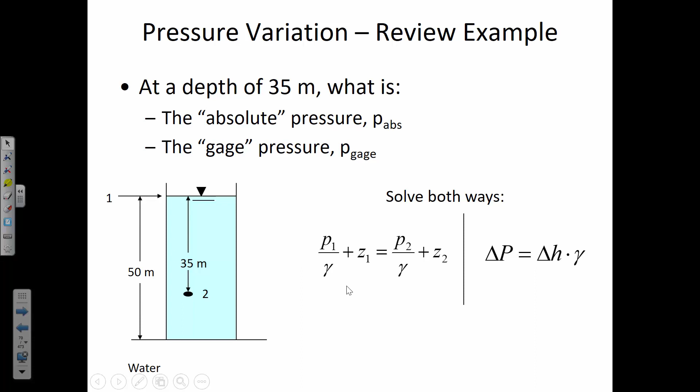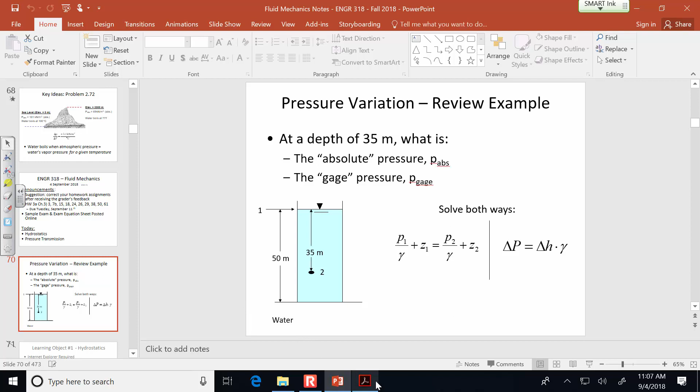Okay, the full version of the hydrostatic equation is P1 divided by gamma plus Z1 is equal to P2 divided by gamma plus Z2. What this is saying is that if you go up in elevation, you're going to have a decrease in pressure. But if you go down in elevation, you're going to have an increase in pressure. Between 2 points, those things are conserved. So between location 1 and location 2, the sum of these two terms will remain constant.

So we know both the elevation and pressure at 1. We know the elevation at 2. Our unknown is the pressure at 2. So I can rearrange that hydrostatic equation to solve for P2. It's going to be P2 is gamma times P1 divided by gamma plus Z1 minus Z2. Now, by the way, the problem statement never said what the unit weight of water is. That's a fluid property that I hope that you'll memorize.

Both the density of water and the unit weight of water, probably even without any effort of memorizing them, you're just going to eventually learn certain constants through the semester, and that's one of them you kind of just need to know. So if we substitute in the values, the pressure at 2 is going to be 9810 newtons per meter cubed times the pressure at 1.

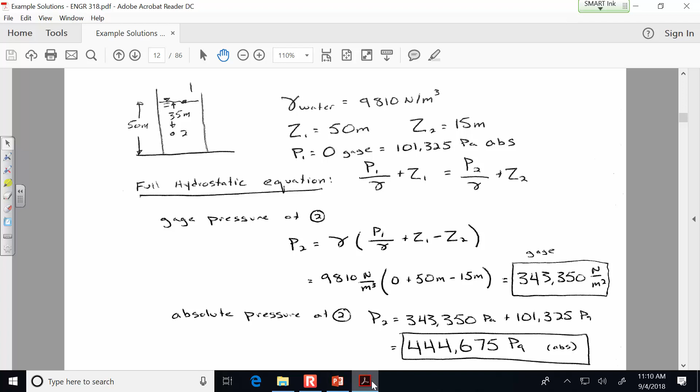If we do the abbreviated version of the hydrostatic equation, then what we're saying is delta P is delta H times gamma. Okay, so the change in pressure is going to be 35 meters multiplied by the unit weight of water, 9810 newtons per meter cubed. So the change in pressure is going to be 343,350 newtons per meter squared, which is the same thing as a pascal. So that's our gauge pressure, because at 1, the pressure was 0. So it starts at 0 and it increases by 343,350.

And so the pressure absolute will be this same pressure plus 101,325, which is atmospheric on the absolute scale. So it'll be 444,675 pascals. So our absolute pressure is the same regardless of whether we use the full version of the hydrostatic equation or the abbreviated version of the hydrostatic equation.

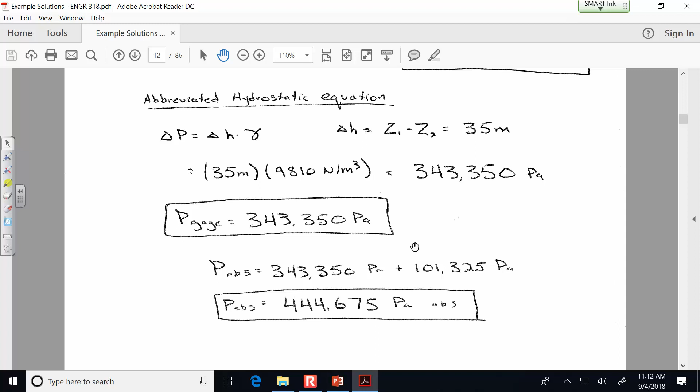Now, the hydrostatic equation describes conditions as long as the water isn't moving. So let's consider just a little illustration. I don't think this is in your notes. This is another bonus. Let's say that we had a reservoir and a water fountain was directly connected to that reservoir. It's not really like this. In reality, there'd be a treatment plant in between so that you don't have to drink dirty water. But let's just assume we punched into a dam and we've got a water fountain at the other end of that dam.

So in an example like this, we know the water surface elevation. Sometimes in problem statements that'll be abbreviated WSE, water surface elevation. So we know the water surface elevation and we know where the fountain is, the elevation of that fountain. So let's go through and calculate what's the pressure in the water fountain and then compare that to the manufacturer's maximum pressure the fountain can handle, which is 850. So if we were going to take that pressure all the way up to the limit, how high could the water elevation go in order to keep the pressure inside the fountain no greater than 850 kilopascals?

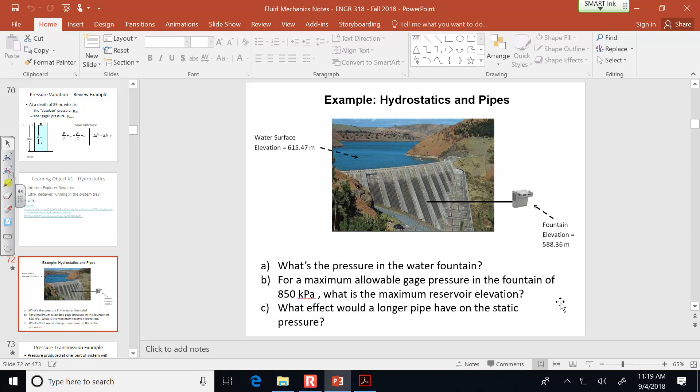All right, so when we find the pressure in the fountain, we assume that the air pressure, the pressure of the air that's just immediately in contact with the water, we're using that as our baseline. So we're saying air pressure is 0. We want to know the pressure in the fountain over and above the pressure of the surrounding air. So that means we can apply the hydrostatic equation, assuming that the air pressure is 0. So let's zoom in on this a little bit better there. All right, so we've got the elevation of the water, the elevation of the fountain. I calculated the delta H based on the two elevations that were given, the difference between the water surface elevation and the fountain.

So it looks like 27 meters of water is going to give us 265,949 pascals, so about 266 kilopascals. Ironically, that's just like the bare minimum pressure that most people would consider acceptable. So you need about a column of 27 meters of water to generate enough pressure that people are going to say, yeah, that's enough to flush the toilet and have a good shower. So that's kind of at the bottom end of the spectrum for typical municipal water pressures.

On the other end of the spectrum, 850 is usually used as a maximum design pressure for municipal networks, and often the limiting factor are water fountains and hot water heaters. They sometimes will have pressure seals that are a little bit sensitive to anything greater than 850. So they could start to leak beyond that.

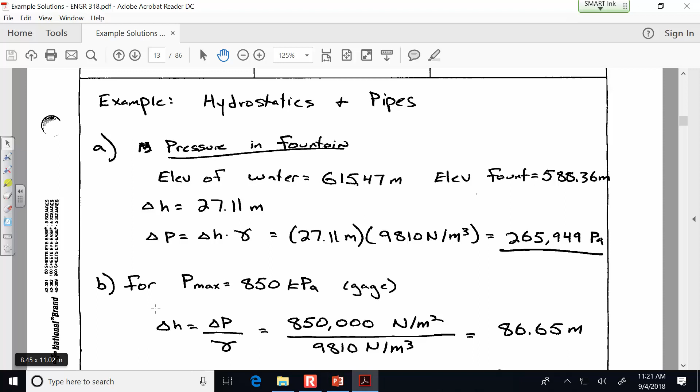So if we're saying the maximum pressure is 850, then what we're solving for is how high the water can be above the fountain. So we're solving for a delta H there. So we could have 86 meters of water above the fountain. And so if we know the fountain elevation is 588.36, then we go 86 meters above that. So that works out to a maximum elevation of 675 meters.

So anybody else get that same elevation? That would be our maximum. We wouldn't want the lake to go any higher than that because then our water fountain might leak. All right? So we'd have to tell whoever's operating that lake not to let the water elevation get too high.

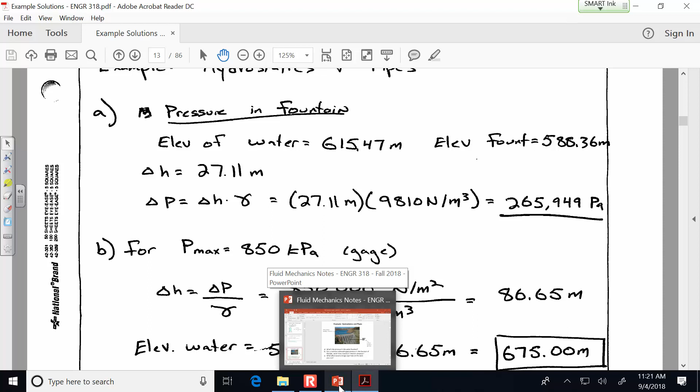Now what about this third one here? What effect would a longer pipe have on the static pressure? Okay, you're right, none. Why? It's only the heights, the same elevation. Now the key here is what we've been using so far is called the hydrostatic equation. It only describes pressures accurately if the water isn't moving.

So if we had water flowing through the pipe, then there would be energy loss due to pipe friction. And we wouldn't be able to use the hydrostatic equation to correctly describe what's the pressure at the end of this pipe. But if conditions are static, then pressure only depends on vertical distance. And it looks like this is a horizontal pipe. So if it's static conditions, meaning that there's no velocity, no flow rate, then the only thing that dictates the pressure in this fountain is the vertical height of water above it.

So it doesn't matter what the diameter of the pipe is. It doesn't matter what the length of the pipe is. It doesn't even matter how rough the pipe is, whether it's a really smooth, polished glass versus a really rough cast iron. It all has the same effect when conditions are static.

So that's a little thing to file away in the back of your mind, is that this equation really isn't useful for conditions where the water is flowing. But there are plenty of situations where it is useful. So we'll continue to use it for now. Any questions on this example?

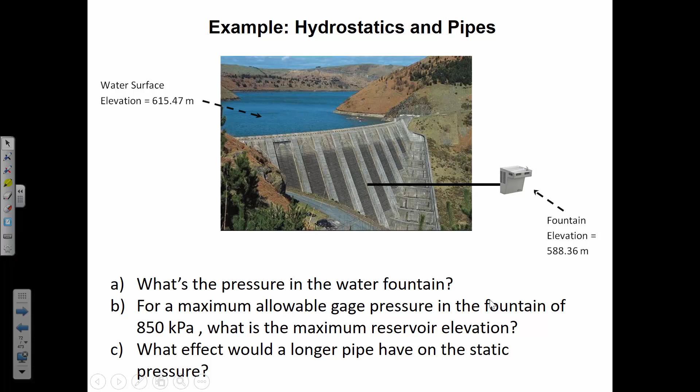All right. Let's talk about pressure transmission. Maybe you've been to a garage before where they have a hydraulic lift. I sure wish I had a hydraulic lift. Anytime I want to change the oil, I got to lay down in the dirt and shimmy, kind of like using your shoulders to shake under there. And I drive a Miata. That thing is like 4 inches off the ground. So I really, really have to squeeze when I want to change the oil.

It's miserable. So the idea of a hydraulic lift, that would be so beautiful, is you could just get it up and it makes the job so much easier. But we're not here to talk about that. What we're talking about is how the pressure that's produced in one part can be transmitted into a force in another part of the system.

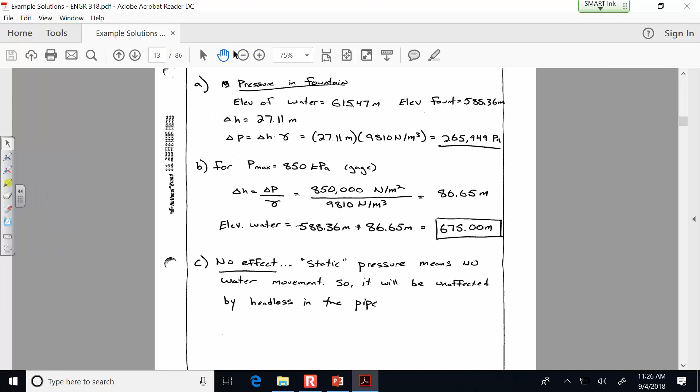Okay, so I'll do that on the whiteboard here. All right, so essentially what we're going to assume is that this vessel is connected to a tube that goes over here, and here's that interface. It's the steel. And the air is above it, and the air is acting down with the pressure of 600,000 newtons per meter squared. And so that's the same pressure that is going to be acting on that steel face. So the pressure acting on that steel face is 600,000 newtons per meter squared.

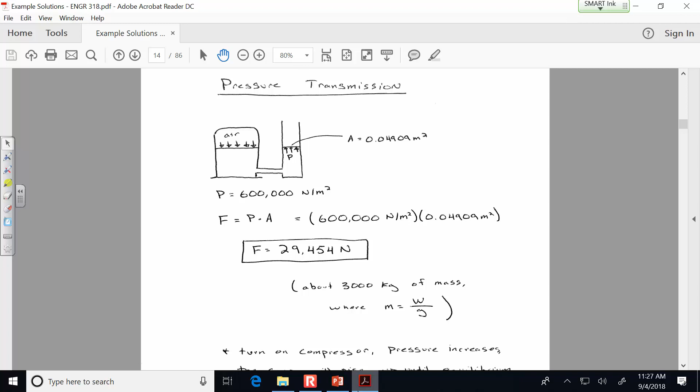And the area, we can calculate based on the diameter that's given. It said that the diameter in the example is 25 centimeters. And so area is pi d squared divided by 4. So pi times our diameter, 0.25 meters, squared, divided by 4. I guess in the slide itself I told you that that area is 0.04909 meters squared. All right, so in the example, area is that. So force is pressure times area.

Okay, so 600,000 newtons per meter squared multiplied by the area of 0.04909 meters squared. So it can lift up 29,454 newtons. And how much is that in terms of mass? Well, if we know that mass is the weight divided by g, then that's about 3,000 kilograms of mass. So that's a really heavy car. That's like a Mercedes heavy, all right? 3,000 kilograms, that's more than 6,000 pounds.

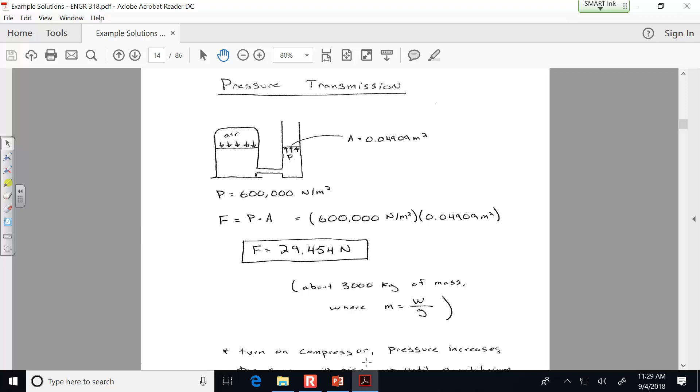All right, so now consider these other questions that are posed here. The force that's lifting up the car is 29,454 newtons. And that's just with things in the equilibrium that they are now. But what if we disturb the equilibrium? What if we turn on the compressor? It was like this when it was 600,000 pascals. But what if we turn on the compressor and we put some more air into the headspace above the oil? What's going to happen? Well, the weight of the car hasn't changed. So let's say that it's the same car that it always was, but we turn on the compressor some more. Then what happens?

It's going to go up. But is it going to go up forever? Let's say that we turn on the compressor, and instead of 600,000, what if we turn it up to 602,000 newtons per meter squared? So we just add a little bit more pressure. Well, what's going to happen is it's going to lift it up, and then it's going to stop. It'll come into a new equilibrium. And so if we add more pressure, then it will go up higher, and then it'll stop. There will be some delta H.

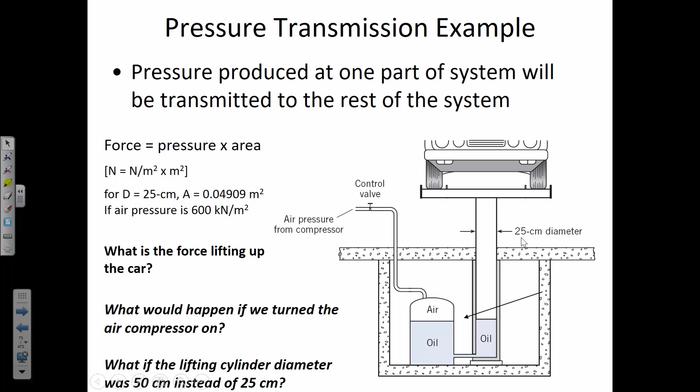All right, so let me sketch a couple of the components here. We've got the handle, all right, and the force is applied in the center of the handle. We've got this little pin at C, but then the force that is going to be acting up on the handle is at B. And so I'm not on the handle, but on the bar. So if we push down on the handle, then there's going to be a force acting upward at B. And what we need to do is a moment analysis about that handle.

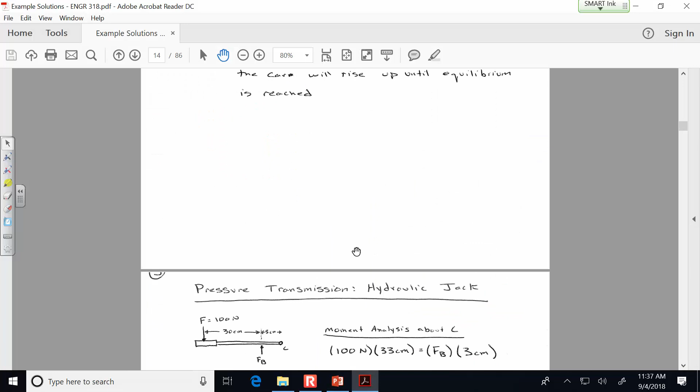So let me switch this off. Okay. So the dimensions here is that it's 30 centimeters from the point of the reaction to where we apply the force, and then 3 centimeters from that, I'm going to call it F sub B. That's the force that's coming up at location B. So it's 3 centimeters from location C to that spot.

And so if we do a moment analysis about C, then it's 100 newtons is the force that's applied at the handle. And that's going to be causing this whole system to rotate counterclockwise. So we've got 100 newtons acting at a total distance from C of 33 centimeters.

And when it's in equilibrium, there's going to be some force at B resisting that so that it's not rotating. But the moment distance is only 3 centimeters. So this is the mechanical advantage part of how this jack works. It's using, like I said before, both mechanical advantage and also pressure transmission. The first part of it is the force at B is going to be 1,100 newtons. And that's significant because it is that force that's acting in a little plunger device.

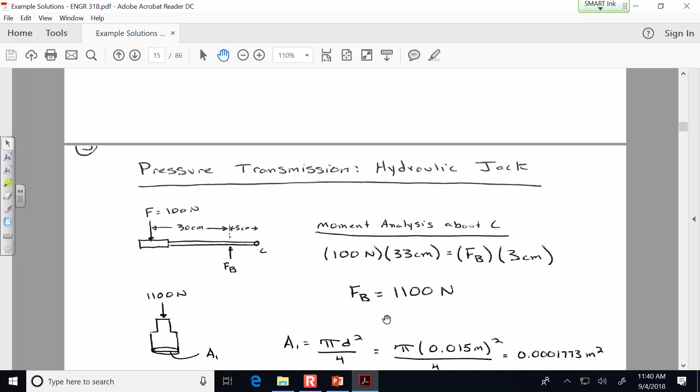And so the force, again, was 1,100 newtons. And the area that it's applied over is related to the size here. So I think in the example it says it's 1.5 centimeter diameter. This area 1 is pi d squared, so the diameter of 1.5 centimeters is going to be 0.015 meters, squared, divided by 4. So that is 0.0001773 meters squared. Any questions so far about what's going on?

Basically what we're just trying to do is find out what the pressure of the liquid inside that jack is. Something's causing it to pressurize. In this case, it's our hand pushing down on the handle, which causes that plunger to go down with even more force because of the mechanical advantage. And the area over which it acts, 0.0001773 meters squared, means that the pressure inside that jack is 6,225,000 newtons per meter squared. So it's 6.225 megapascals.

All right, now the other part of the problem is related to a difference in areas. So it's a larger diameter over here on the right side. And so this is our A2. On the other side of the jack, the cylinder that's acting upwards has a diameter of 5 centimeters. And so A2 is going to be pi d squared divided by 4. So the diameter is 0.05 meters. We square that, multiply it by pi, divided by 4. That's 0.0019625 meters squared.

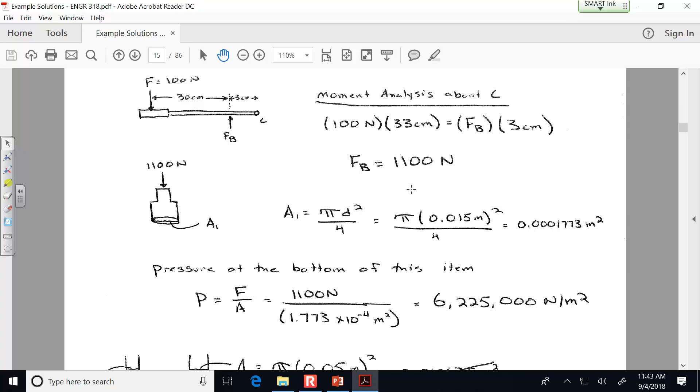So we have essentially pressure that's acting upward on some area. The pressure, we remember, is 6,225,000 newtons per meter squared. We know the area, that A2 area. So the force is pressure times area. So 6,225,000 newtons per meter squared, and the area is 0.0019635 square meters. So the force is 12,222 newtons. That's the force that's applied at location 2. That's the load this jack can lift.

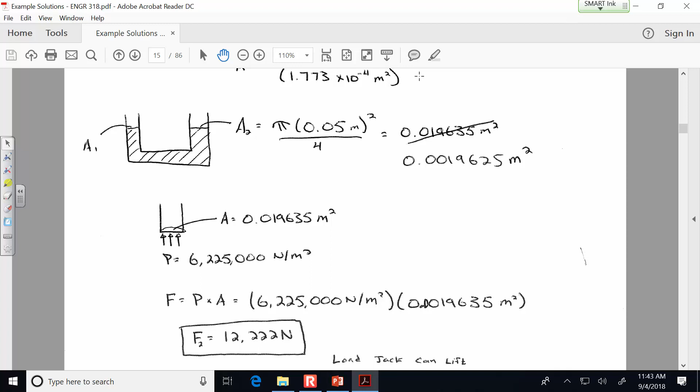So if A1 and A2 were the same, like if the two diameters were equal, like this plunger and the other one, then it would only be able to lift 1,100 newtons because that was the force that was applied from B. But it magnifies its lifting capacity by having the same pressure act over a bigger area.

And that was an idea that took a long time for me to wrap my head around. Like, I remember the first semester I taught fluid mechanics. It was in 2005. So think about where you were in 2005. I was teaching fluid mechanics for the first time. And I sat there in my office thinking, it seems like it's creating energy. You know, like thermodynamics says energy can't be created or destroyed. I was thinking, this just seems wrong somehow, that you could lift increasingly larger amounts by having a larger area that it acts over. But that's exactly how it works. I just needed to adjust my thinking to adapt to that new reality, that's pressure transmission. If it acts over a larger area, you can lift heavier things.

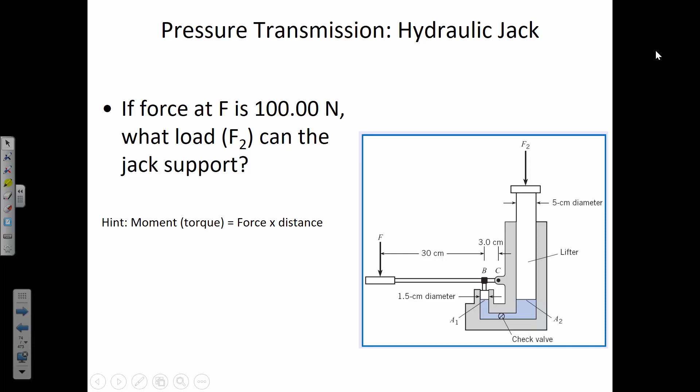So are there any questions about this example or the calculations that I did on the whiteboard? All right, let's talk about a way to measure pressure.

There's something called a piezometer, and a piezometer is a very simple way of measuring the pressure inside of a pipe. If you have a pipe, and let's say that it's carrying a liquid rather than a gas. So if it's carrying a liquid, one way to measure the pressure is to cut a hole in the pipe and then connect a tube to that hole. And the water level will rise to some elevation, and then it will stop when it comes into equilibrium.

Like if we punched a hole in the pipe and there was no tube there, then just the liquid would be spraying all over the place. But we've put enough of a sleeve around that hole so that the water can rise upward, and then it comes into equilibrium. So this H is closely related to the pressure inside of the pipe. So if the H, the water level, rises to a distance of 10 meters, then all we have to do to find out the pressure in the pipe is apply the hydrostatic equation.

Okay, so to apply the hydrostatic equation, remember that delta P is delta H times gamma. So delta H is delta P divided by gamma. So in this case, the pressure in the pipe is going to be the 10 meters, and if it's water that's in there, then we'd use 9810 newtons per meter cubed. So that tells us the pressure in the pipe is 98,100 newtons per meter squared.

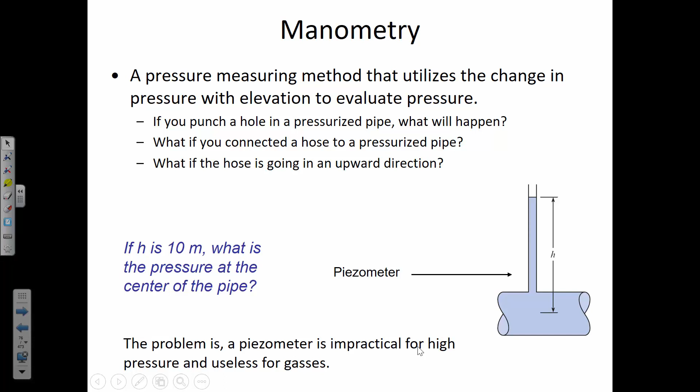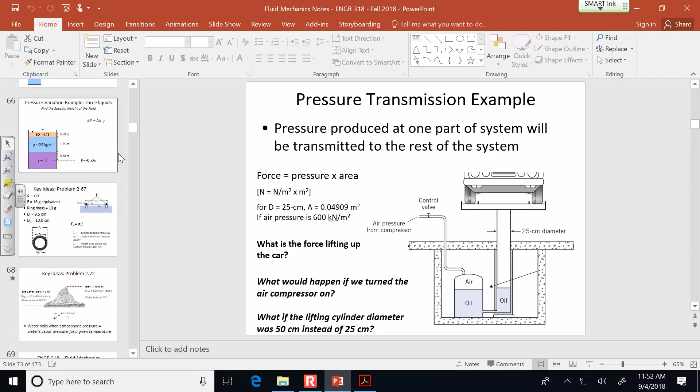All right, let's talk about some of the key ideas in the homework that you've got coming up. I think this is one of them, 315. Because there's so many of them, I want to help you get started breaking it down. What it says is that the air space pressure is 50 kilopascals vacuum, and the water height rises to H if the airspace pressure is changed to 25 kilopascals vacuum. Will H decrease or increase, and by how much?

All right, so let me help you visualize what's going on. If we talk about absolute pressure, the pressure at the interface of the gas and the water is 100 kilopascals absolute. If you go down, the pressure is increasing. If you go up, the pressure is decreasing. So initially, there's 50 kilopascals vacuum. That means less than atmospheric, so that would make this 50 kilopascals absolute. You can calculate the delta H with the hydrostatic equation.

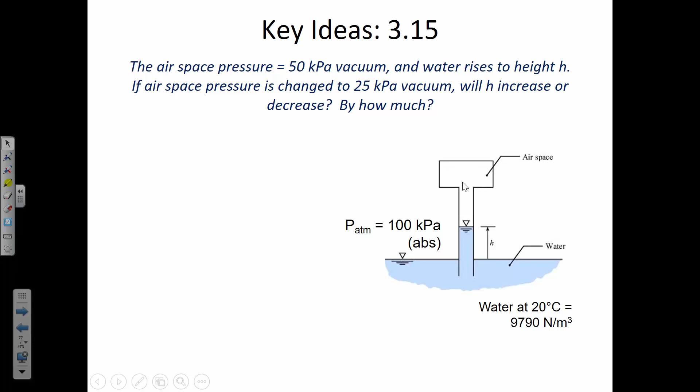All right. Find the H before, where the vacuum was 50 kilopascals. Find the H after, and they're asking by how much does it change. That just means find the difference between the two. You guys have these key ideas in your handouts, right? It's included in the notes?

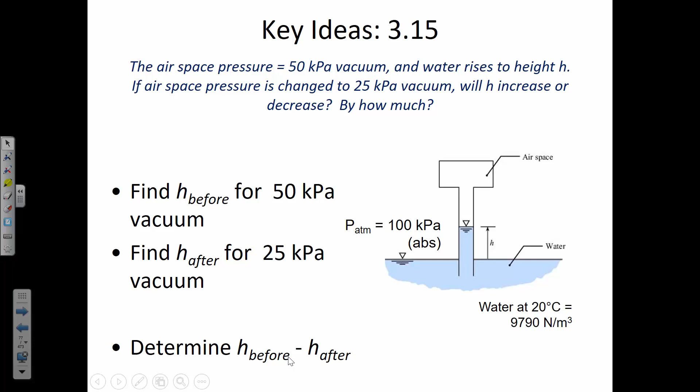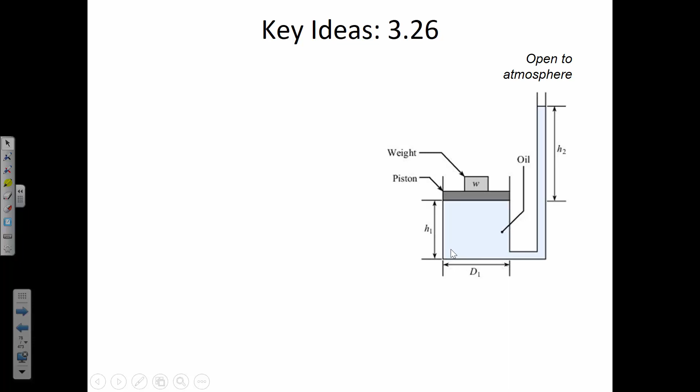All right, so this one, there's a weight that's acting over a piston. You see that the diameter of that is specified, so you're going to assume a circular shape, calculate the area, and you've got a weight acting over that area. The question is, how high is the liquid level going to rise if it's open to the atmosphere here? Again, this is combining the two ideas we've been talking about today, pressure transmission and the hydrostatic equation. What pressurizes the liquid is a force acting over an area. Force is pressure times area, so pressure is force divided by area. The force we're talking about is the 5 kilogram weight, so you'll have to use weight is mass times g, because they've given you the mass and you need to know the weight.

You can calculate the pressure inside the liquid, and the thing to remember is that the pressure at that interface between the piston and the oil is the same as the pressure over here inside this right leg of the tube. That's why they're giving you the dimension H2. H2 goes from the interface of the oil and the piston up to the interface of the oil and the atmosphere. So it's just a simple hydrostatic equation problem once you find out the pressure inside the liquid. Why do they give you the unit weight? Actually, they don't give you the unit weight. Why do they give you the specific gravity?

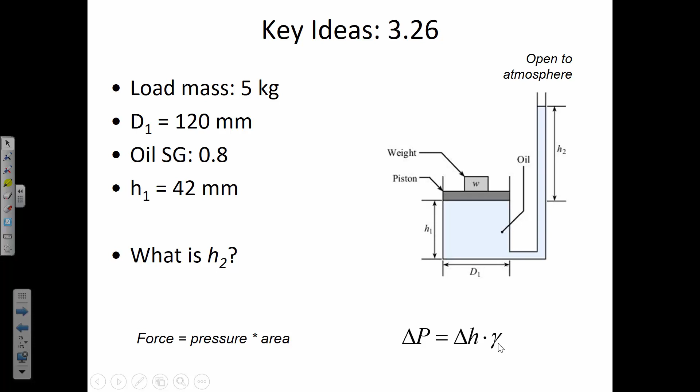Any questions about this problem? All right, this one's a little tricky.